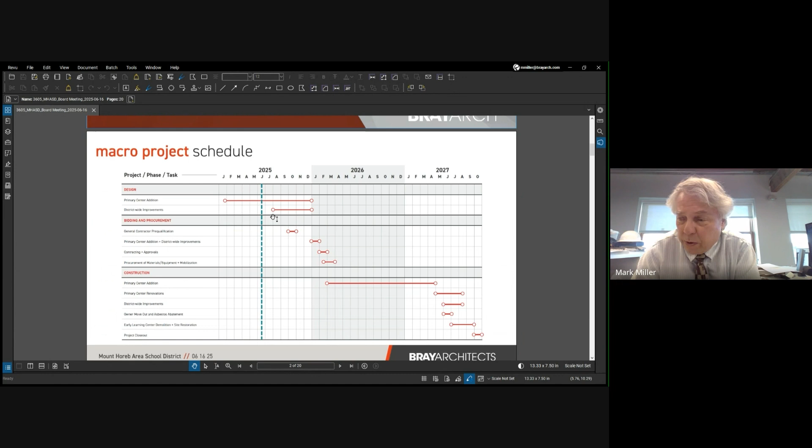So I think you've seen these schedules before. We're just progressing through the schedule. I think we're currently up to date project-wise. In one respect, we're a touch ahead in that some of those district-wide improvements with re-roofing and restroom work over at the middle school, we've got a jump on getting started. And the primary center is moving right along.

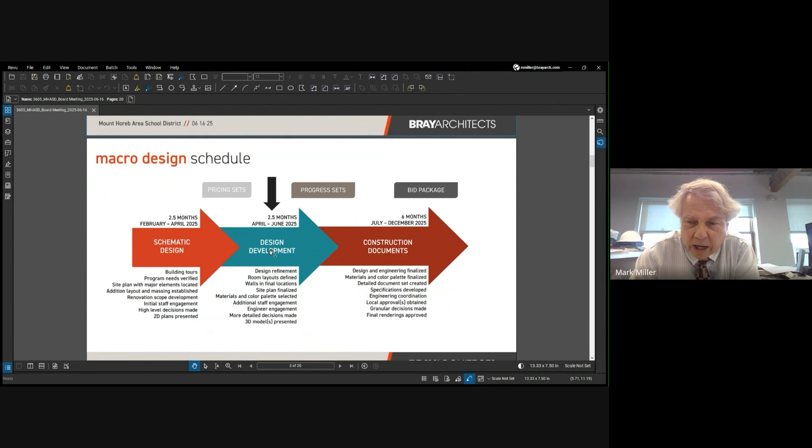So the design schedule, we're still in design development. We'll be wrapping that up here at the end of June. So I think we're getting a lot of work done, and it's been positive.

Staff engagement, we've had multiple meetings. We've had what we call user group meetings, trying to speak to individuals about the needs of their classrooms and departments. We've spoken with the kindergarten, speech, math intervention, special education, athletics, administration, health, library, kitchen, reading intervention, and music staff. And they've all been very nice, very generous with their time and their suggestions and comments. It's been very helpful, and we are enjoying that partnership.

And we'll be continuing this over the summer, a little less, but still some over the summer, and then again this fall once school gets back into session.

Budget is proceeding, I think, in the direction we've got laid out. We're still following along with that budget. We are going to be taking some alternate pricing options to give us a little more flexibility. We'll ask the contractors for additive alternates, and they'll each have a different number, alternate number 1, alternate number 2, and it gives us some flexibility in putting together the final price. So we'll be adjusting those as we get through the summer.

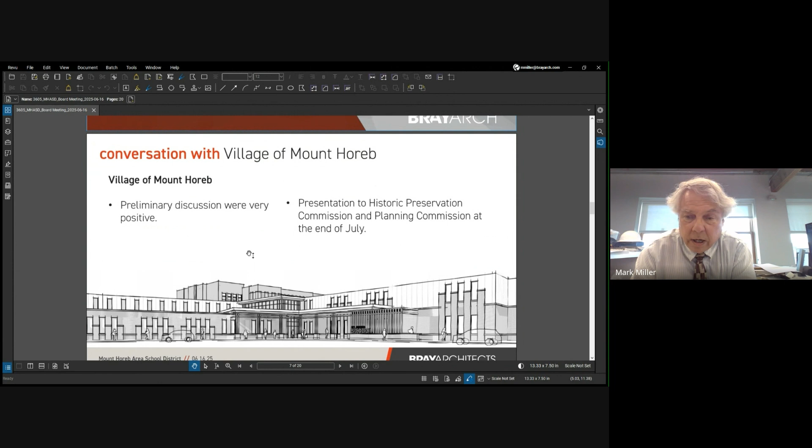We are having a preliminary presentation to the Historic Preservation Commission and the Planning Commission at the end of July, I think it's the 23rd. And the village staff thought it might be good, since this is a large project magnitude-wise, to ease the two commissions into it. So we will be presenting preliminary information at the end of July, and then we'll have the final submittal later this fall.

Site update. The basic concept, I think, has stayed the same, but we're refining the details. So we've got our parent drop-off loop, our parking. We've had some discussions with the district staff on the number of parking spaces, and I think this is going to get adjusted upward a little bit.

I think we're trying to get the exact number. We want to make sure we have enough parking for those day-to-day activities. But on the other hand, we don't want to have additional parking that never gets used except for those 1 or 2 events a year. It's expensive to install that excess parking, it's expensive to maintain, and it also hinders us with our stormwater runoff, management, and quality. So we want to make sure we get the right amount of parking that gets used on a regular basis.

And we are going to be continuing to work through that. But I think that basic layout has stayed the same and works very well. We've got our bus drop off along the north side, which pulls up closer to the playground area.

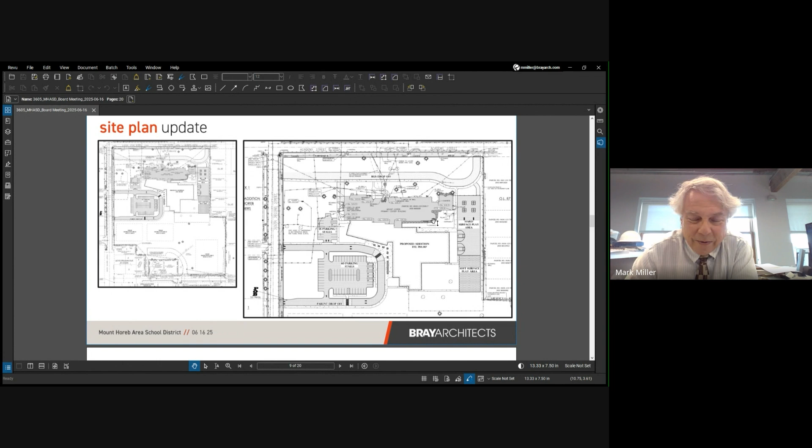Our existing parking hard surface will become a playground, and then we'll have a soft surface playground area to the south. We've been starting conversations about playgrounds, and that always gets people excited. It's kind of fun because playgrounds are just fun.

The floor plan really hasn't changed a whole lot. We are working through details. One thing that has changed a little bit is the cafeteria kitchen.

We've got our individual toilet rooms along the east side of the room now, the existing gym. And then we've got the entrance for the servery from the hallway, so the kids will come from their classrooms into this hallway, into the servery, pick up their food selections, and then come out to the cafeteria. The rest of the kitchen layout is along that north side.

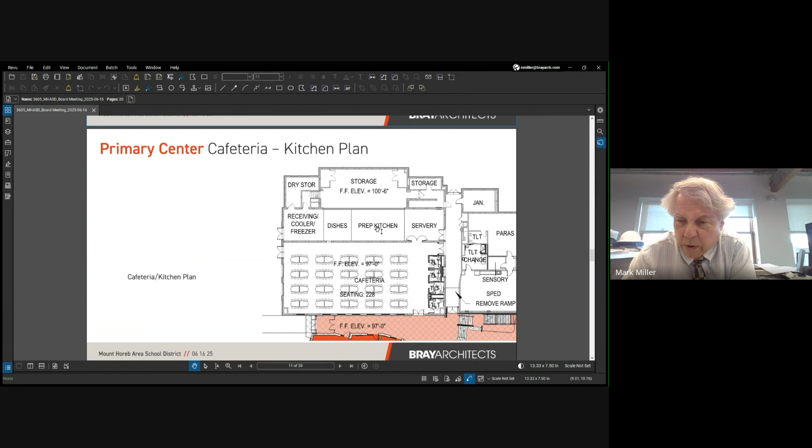We've got our kitchen consultant, Brett, working on the detailed layout of this, and hopefully we'll get something from him this week or next week, and we'll get back with Michelle and the other district folks on that kitchen layout. We've also been working on construction details, what kinds of walls.

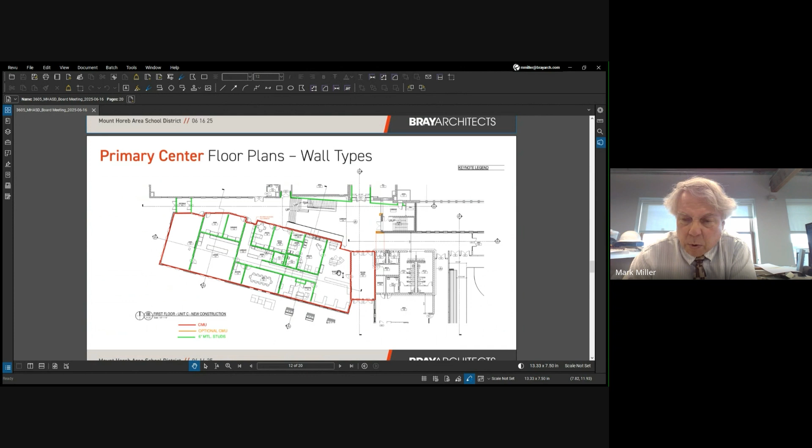We've gone through with the folks on what kinds of things we want to see for wall types - concrete block, both from a structural standpoint and from a finish standpoint and durability standpoint, and metal stud walls with abuse-resistant sheetrock, gypsum board. I think we've got that fairly well nailed down now, but it's been a little bit of back and forth on that.

This past week we also had our preliminary interior design presentation, and we went through a conversation with Melissa from our office on the material types, what the durability of those materials are, the ease of maintenance, life cycle costs. Those are all important items that need to be balanced.

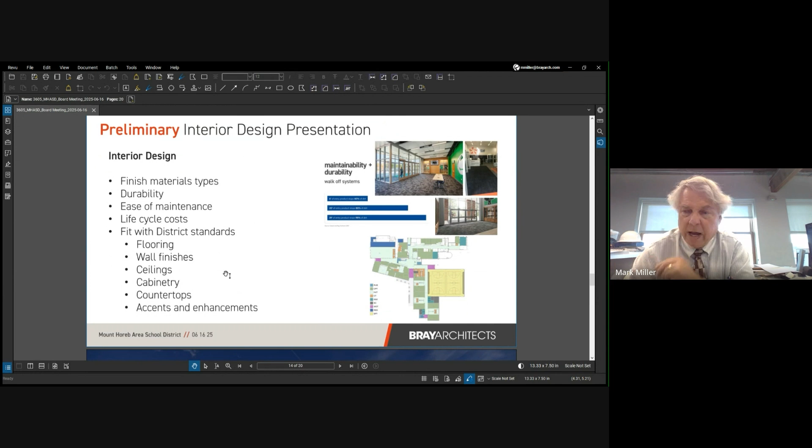Fit with the district standards - we talked about flooring, wall finishes, ceilings, cabinetry, countertops, and then those accents and enhancements that make it a fun and enjoyable building to be in as well. We're working through that, and we'll be having more conversations on interior finishes, material types, and colors.

The exterior appearance hasn't changed too much. We're working on colors, and we've got orders in for bricks to try to match the existing brick.

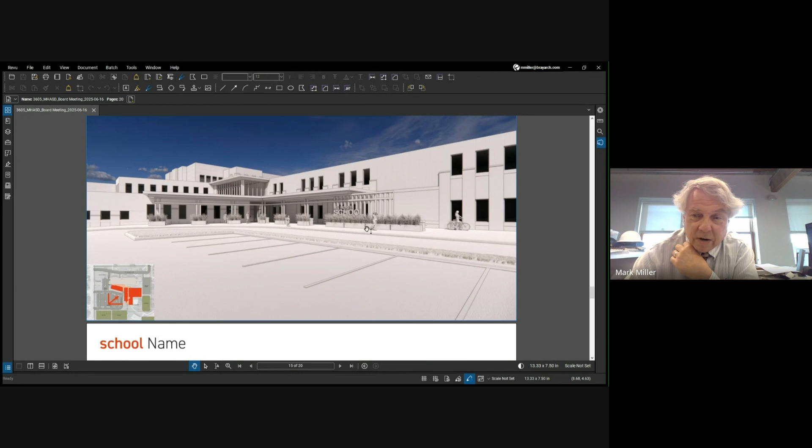One of the things, if you can see in the elevation here, we've got school name because we're not sure at the moment - but will the school have a new name, or stay with Mount Horeb Primary Center and Mount Horeb Elementary School?

Other thoughts? We're not really looking for an answer now, but we are looking for people to start thinking about this, and we're welcoming feedback on how we want to approach the name of that school, since the Early Learning Center will be disappearing down the road.

Our next steps: we'll continue with our design development, interior and exterior design materials. We're getting samples pulled together so you can actually see what the materials feel like and look like. We had some this past week, and we'll be getting more of those.

Continued engagement with our engineers and consultants. I mentioned the kitchen consultant, but we're also coming out Wednesday for a walkthrough with the MEP folks and the structural engineers. They're going to be looking at the existing building and construction pieces and how we're going to extend and expand that, and also discussing the HVAC systems and how we're going to approach that expanded geothermal system.

As I mentioned earlier, we'll be having additional user group meetings sporadically across the summer, but definitely more as the school year starts back up.